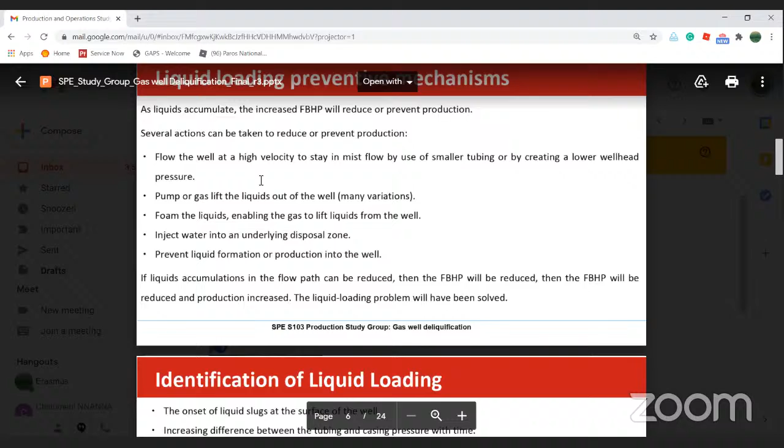Are you seeing it yet? Yes, we can see it. We can see it here. Yes, we can see.

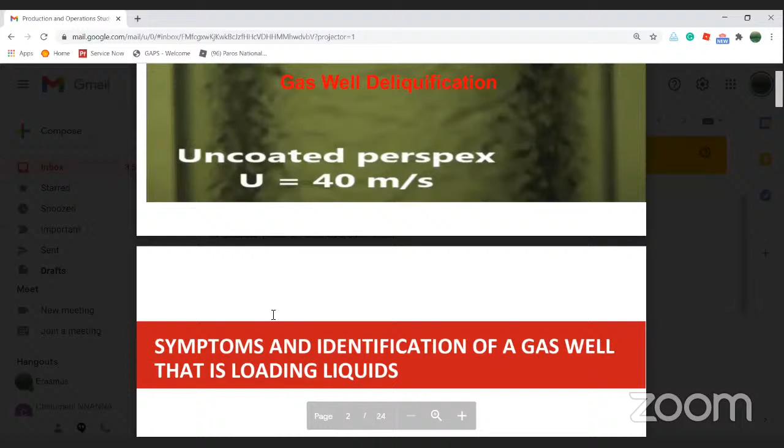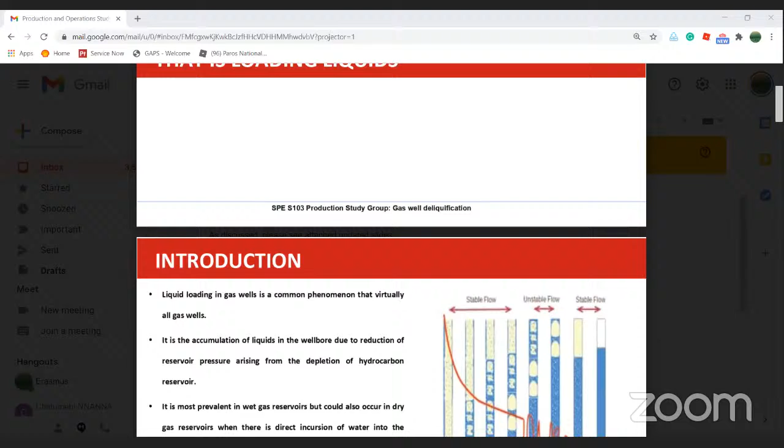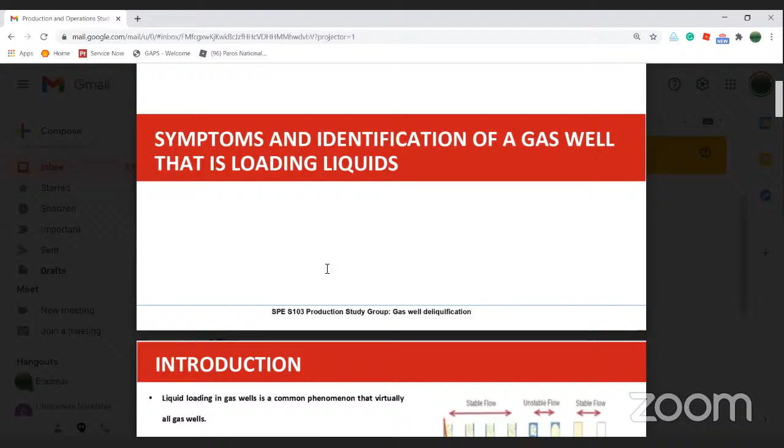So this discussion is really around gas well de-liquification, addressing the issue of liquids building up in the well, starting from the sump or rat hole, through the sand face, and into the tubing, reaching reasonable heights. The liquid itself is mainly water, both water of condensation from the gas or free water from the reservoir that is mobile and could be accessing the pressure interval, or natural gas liquids, which we loosely call condensates. These are the kind of liquids we produce with gas.

Over time, as the dynamics of the reservoir and well change, the gas, which is actually the transporting phase of the multi-phase mixture, begins to experience reduced velocity. Once that reduction starts, the carrying capacity of the gas reduces, and you begin to see what is shown in the diagram. Before, everything flows upwards as in the first picture. In the second, some liquid is not carried along until the liquid level builds up more, until the well can't carry on because the back pressure on the formation exceeds the reservoir pressure, and the well dies. A lot of things happen after that, but it's rare for this problem to start initially in the gas well. Usually with time, as the reservoir matures and dynamics change, including reduction in reservoir pressure and even formation damage, this can occur.

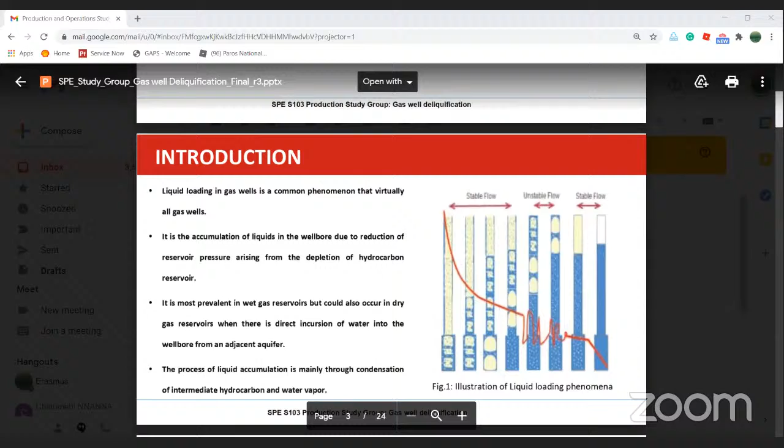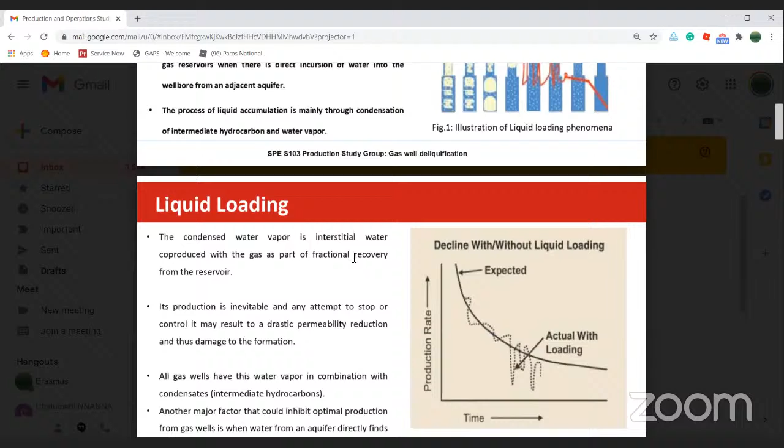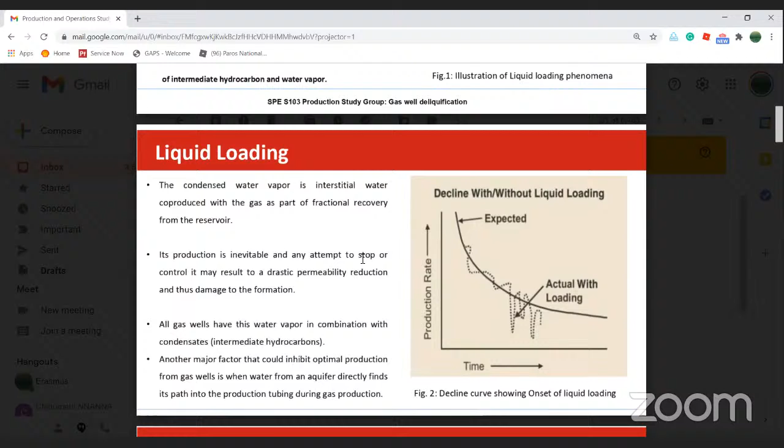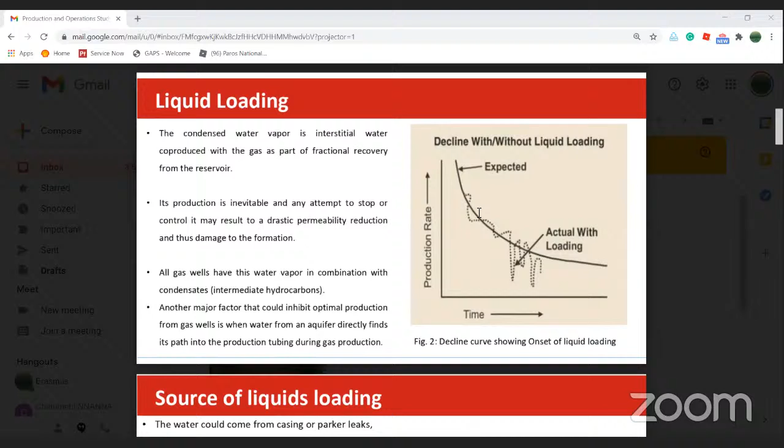So I mentioned earlier that the kind of liquid that causes this problem is water that accompanies gas production, which may condense out of the gas and build up. But mainly the natural gas liquids, which are the heavier components of the flow stream, have a way of dropping out over time and causing this problem. So you can see the profile of the well begins to show erratic behavior, instead of a smooth decline. Because back then it goes up and down, sometimes it now starts watering.

So the source of the liquid, like I mentioned earlier, could be coming from casing or packer leaks, or maybe from what we call coning, which is a phenomenon where you have an imbalance between gravity forces and viscous forces. Then you have a rise of liquid, as if the liquid is rising above gas because of the high drawdown that we expose the well to.

When you have a decline in the reservoir pressure, that also induces liquid loading. Anything that leads to a reduction in the flow rate of the gas well has a tendency of inducing liquid, because gas, being the transporting phase, must have sufficient velocity to lift the liquid along with it. Whenever that condition is not met, the liquid will tend to fall back into the well.

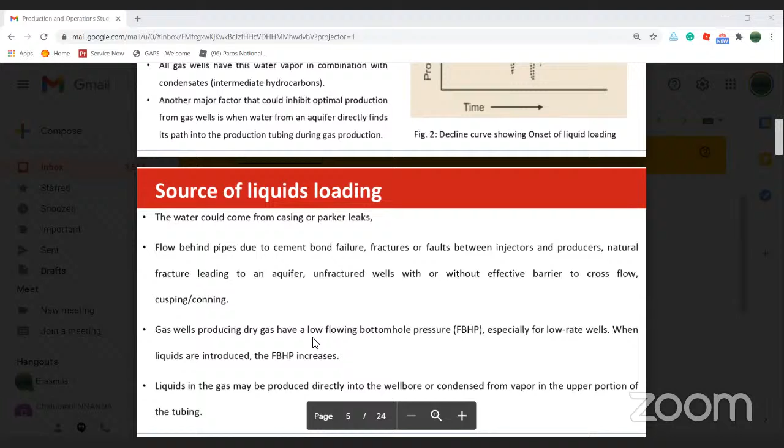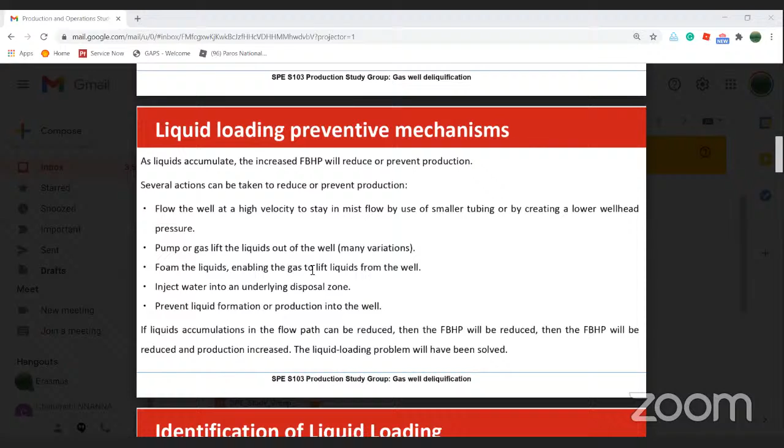So some preventive mechanisms for this phenomenon - in medicine they say prevention is better than cure, but in petroleum engineering it doesn't really hold. Some prevention would mean you shouldn't even produce the well at all. So sometimes we just let the problem occur and then try to find a solution. That is what happens most times. You will not drill a well and say water will never break through, because that means you will not produce at all.

So some actions you can take to reduce or prevent liquid loading: as much as possible, ensure that you are producing this well at a high velocity. That is when you still have control over that. The interesting thing about that is, yes, that's the only way you can, when the energy of the well still allows you to throttle it as you wish. But over time, when a lot of pressure decline has happened...

Then you can do pumping - a pump for the liquid, you install a pump that pumps it out for you. Or even do gas lifting of the gas wells.

So foam, you can also inject foam for the purpose of reducing the hydrostatic pressure of the liquid. Getting foam in there means the pressure that the liquid column exerts on the formation reduces when it's able to keep packing. But again, injecting foam continuously means major modification in the production system, and you also have to be aware of fouling the process.

Is it a good time to take over? Hello, Dr. Koleke. Hello? Is anyone hearing me? I can hear you, yes, now. I can hear you also. I can hear you now. Okay, I don't know whether they responded. Yeah, okay, so Doc, if you don't mind now, it's time to carry on, unless you need to get to the point where I'm coming in. Is it a good time? You can continue from where I stopped, so we do not repeat what I've said. Oh okay, okay, thank you very much, and thank you.

Good evening, Doc. Can we roll the slides down to just after causes of liquid loading? Let's keep going down, please. Let's go down more. Let's go down. No, can we go back a bit? Back a bit, sorry. Back a bit more. Back a bit more. Back a bit more. Oh, okay.

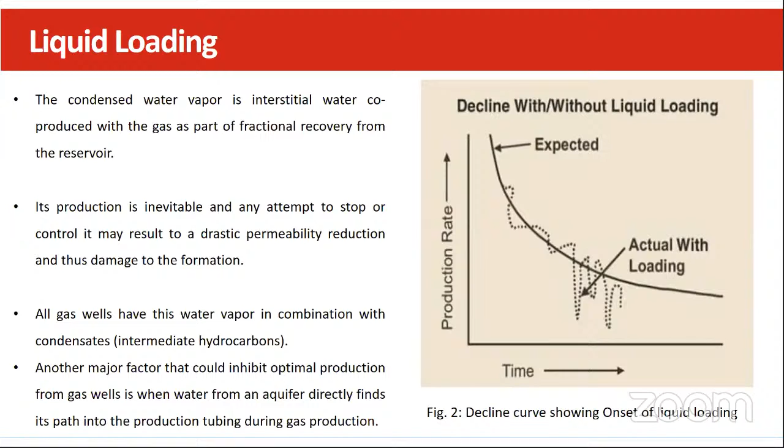Let's move forward. Let's move forward a bit more. Okay, we can stop at symptoms. Yeah, so basically, yes, we can.

Thank you. So some of the common symptoms of liquid loading - liquid loading is basically a situation where the liquid phase composition of a multi-phase stream from gas wells begins to drop off or drop back into the well bore, because the superficial velocity of the gas core is supposed to drag this liquid film. The liquid phase often occurs as liquid films at the walls of our tubing in the well system. So when gas velocity drops off, the gas core is no longer able to drag this liquid film up, and that's when we begin to have liquid loading. This often occurs when reservoir pressure is low.

So some common symptoms of liquid loading, things we observe that tell us liquid loading is around the corner, include the presence of orifice pressure spikes - we begin to have pressure spikes within our orifice, which is a pointer that we are about to experience liquid loading. Another thing is erratic production and increase in decline rates of gas wells. We begin to see drop-offs in our million scf - for instance, we're expecting 50 or 10 million scf, and we begin to see a drop to 8 or 6 million scf, which is not what any operator wants.

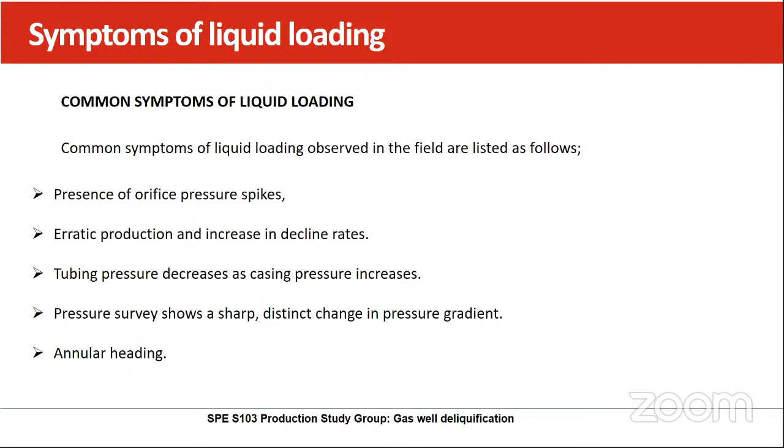Then annular heading - annular heading is more or less some form of slugging within the gas well system. So Simeon, can we move on to the next slide, please?

So as part of identifying liquid loading, we need to be conscious of knowing when we have onset of liquid slugs within the gas well streams. Liquid slugs mainly means you begin to have fluctuation of your liquid films - they begin to go up and down, creating oscillation within the system. That's also a pointer to liquid loading.

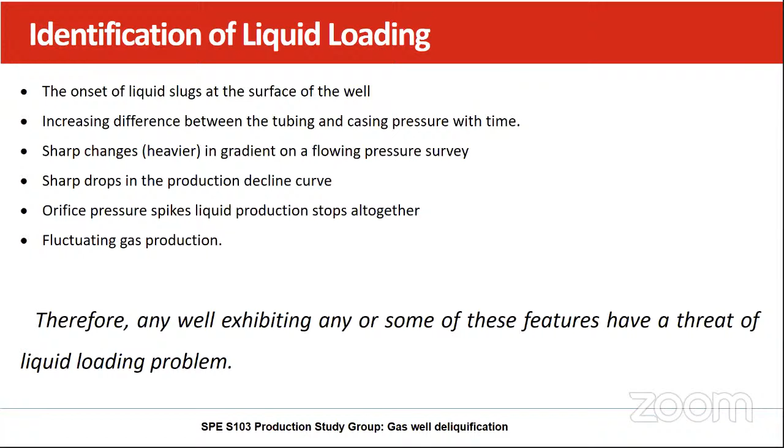Then we begin to have increasing difference between the tubing and casing pressure with time, similar to some of the things mentioned earlier. Then sharp changes in the gradient, also similar to earlier points. Then fluctuation in gas production - these are very threatening signs, which is not good. Can we move on to the next slide?

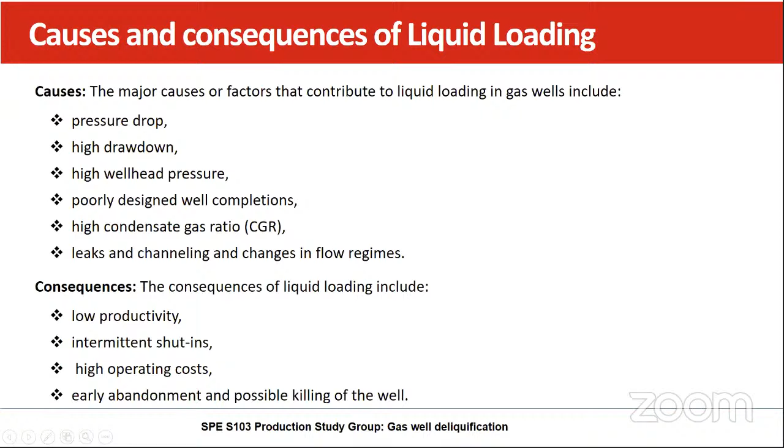Then the consequences or results that come from liquid loading include low productivity, which no operator wants to have. We could have intermittent shut-ins, high operating costs - these are things operators do not want at all. But these are the consequences that could result from liquid loading. And most importantly, we could have early abandonment, which is not what we want.

Thank you, Simon. Another important thing is, what are the preventive mechanisms for liquid loading? As liquids accumulate, we have an increase in our flowing wellbore pressure, and there are several actions we could take to prevent that. Number one is to flow a well at high velocity to stay in mist flow, by use of smaller tubing or creating lower wellhead pressure - basically trying to reduce the drawdown or reduce any form of inhibition to getting your gas stream to the surface. Another preventive mechanism we can apply is the use of a pump or gas lift.

So, be able to support the production of the gas phase. Then we could also apply foam within the liquid phase. This could enable the gas to lift the liquids from the well.

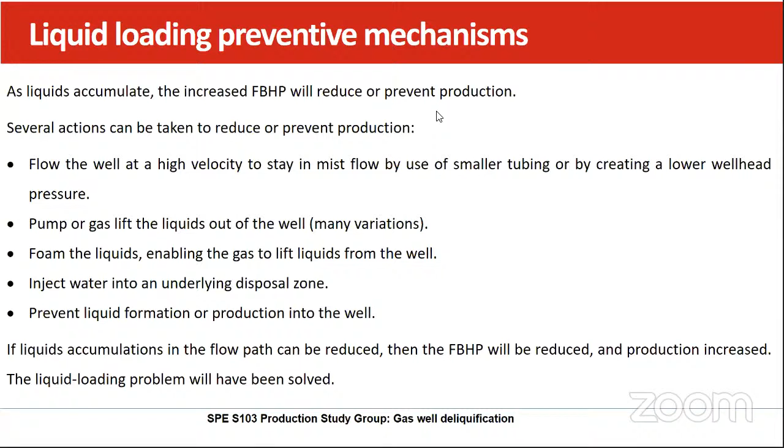So methods available in the industry to manage liquid loading include maintenance of natural flow, assisted lift of the plunger, downhole pumps within those gas wells to support the pressure within the system and make sure you're able to overcome the hydrostatic head that could prevent your gas stream from coming to the surface. Then we also have downhole water sinks or downhole gas-water separators, because if we're able to separate downhole, what we need to lift from our gas well will be lighter and easier to lift.

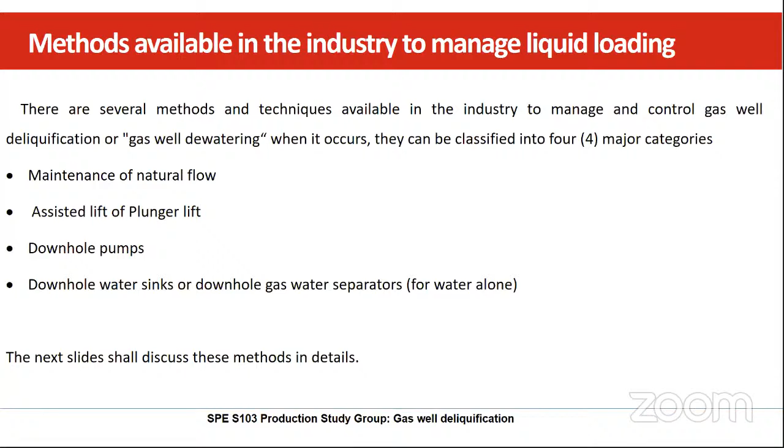So the next slide is about current and emerging techniques for de-liquification of gas wells. It's also key we need to consider. Some of the methods include sizing production strings or installation of a velocity string. There needs to be properly designed strings which you could install, as well as installing them with injecting foamers, which I mentioned earlier, a key technique operators need to look out for because of its effect causing coalescing of the liquid droplets within the walls, making it easier for the gas within the core to push the liquid up.

Then compression is also another technique that should be given attention, and then plunger lift. We have in Fig A and B some of these methods illustrated. So can we go to the next slide?

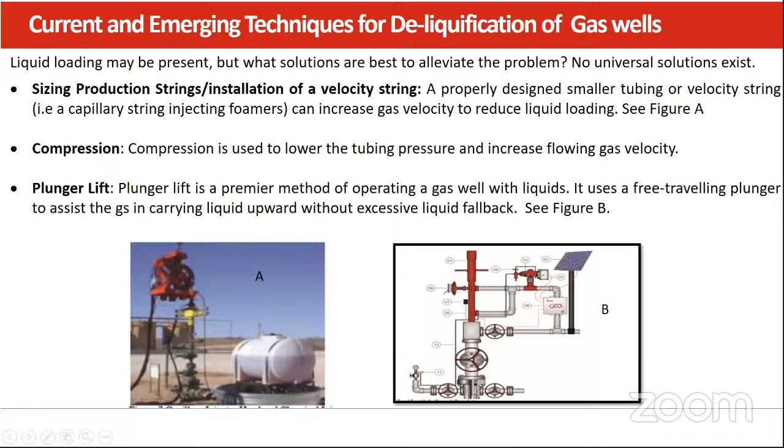So still on the earlier slide, that was more around the current techniques. For some of the emerging techniques, we have beam pumping. In the beam pumping system, it functions when the wells do not have enough pressure and the gas liquid ratio is not conducive, so you use the beam pumping. It's similar to using some form of downhole pump to manage your system.

Then we also have hydraulic pumping, which is using hydraulically powered pumps to support your system. And then we have injection systems. Instead of producing water from the gas well, it's possible to rather inject the water into the zone below the gas, and this could enhance your production and prevent liquid loading.

Some other future methods include automated intermittent production using wellhead temperature as a proxy to help guide you. Then you also have enhanced oil recovery methods you could use, as well as water lift downhole pump methods. So can we move to the next slide?

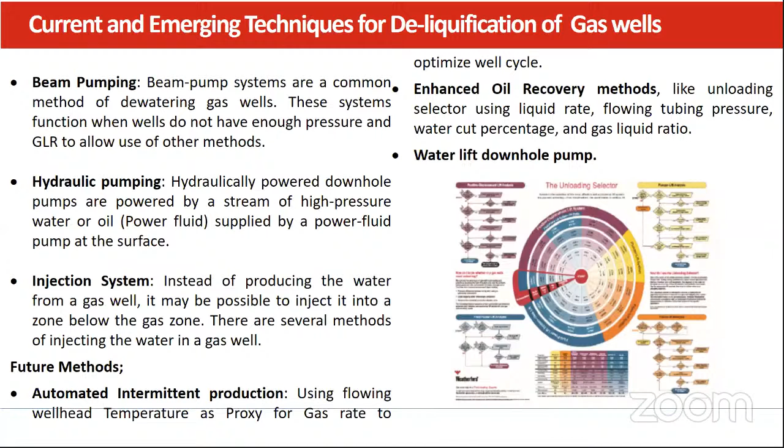So, nature and causes of liquid loading. Erasmus, I don't know if you can come in here a bit. Are you there? So, but I'll carry on. So, nature and causes of liquid loading. Okay, I don't know, are you there? Yeah. Can you come in from this area, or do I carry on? Yeah, I think you have momentum already, but let me just talk through this then.

Okay, so like Doc has been saying, it's really about low rates, right? So when you can, always ensure that the gas has a sufficient rate. And when I say rate, it has a direct proportionality to velocity, right? So the nature of this is that low gas rates begin to occur, either the one you instigated yourself by producing at abnormally low chokes, or the one forced on you by the dynamics of the rates of water. Like imagine cutting water, which means your envelope of production deteriorates, and what the well is able to deliver is lower.

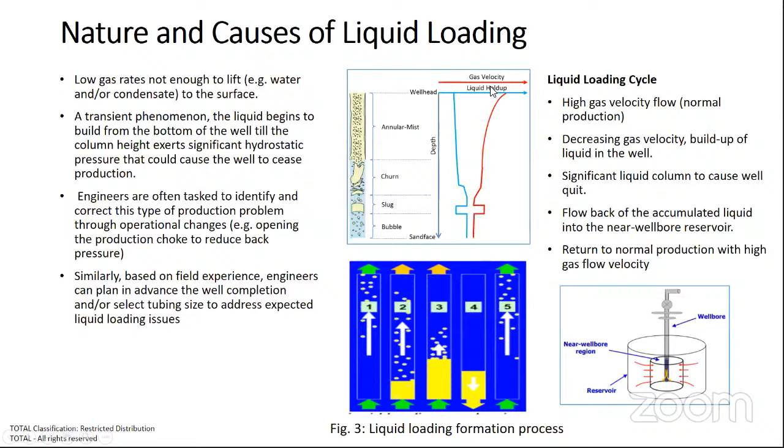And then, if for some reason you overestimated the capacity of the reservoir and oversized the production tubing, expect the liquid loading will be very, very high. And if you have formation impairment, it will cause deterioration of your inflow performance, and that also influences liquid loading.

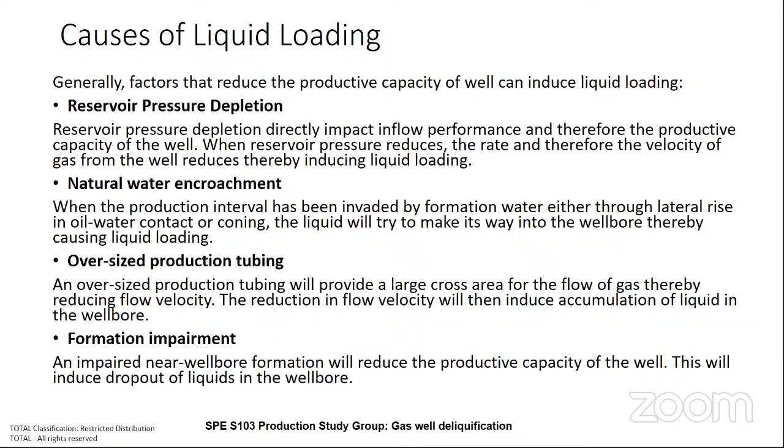We brought out a case in the Niger Delta because it's important we do not address this as a theoretical problem - it's not enough to be aware and say yeah, there's something called liquid loading, but never see it. So this is a well that is completed with 7-inch tubing.

So this is a well completed with 7-inch tubing, a high-rate gas well shooting over 100 million scf per day for over 5 years before we began to see decline. The initial CGR was decent, around 80, and it produced significant quantities of NGL.

Then the aquifer support was moderate. What that moderate aquifer support meant was we had some depletion, about 8% depletion of pressure, as occurred over time. And then the plant inlet pressure - this is very key.

Every gas plant for processing produced gas has a minimum pressure it is set at. That means everywhere you have to overcome that pressure for the gas to come into the gas plant. So the plant inlet pressure is 1,200. That means if a well has a flowing tubing head pressure of 1,000, the well cannot produce.

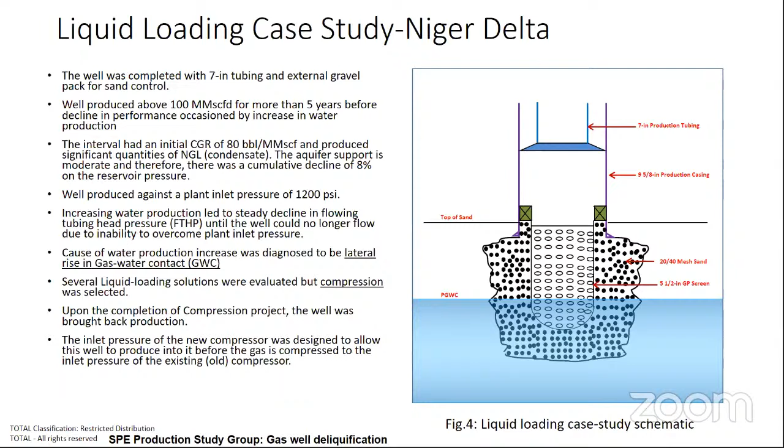What this means for such a well, just in case you see them, is you go there, there's flowing tubing head pressure when shut in. But when you open it up, the pressure drops, and it means the well will not be a useful asset to you.

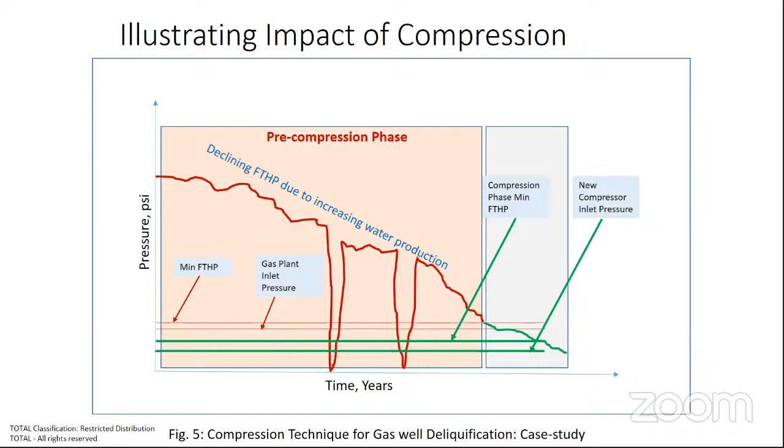Almost all gas wells produce wet gas, so it's important to know there's always some portion of liquid that comes with the gas we are producing. That's what often leads to liquid loading in gas wells. Water and hydrocarbon condensate make up the main liquid phase composition.

Initially, as my colleague Ras mentioned, we have high rates, and those high rates make it stable for you to continue producing. This is prevalent within the annular flow regime, when you have gas at the core and you're able to drag the liquid films on the side.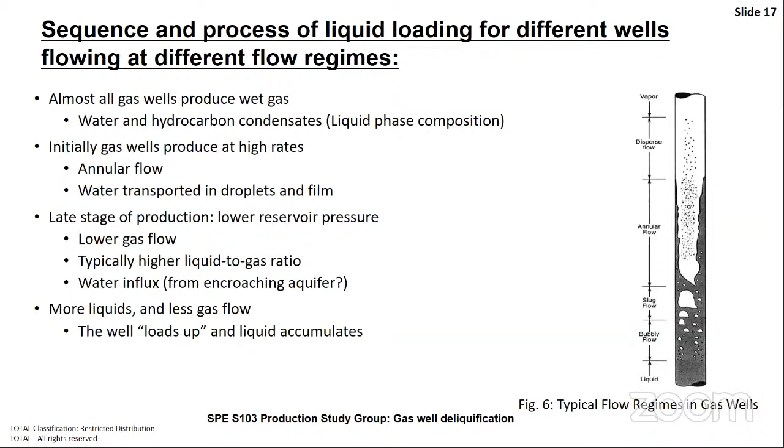So here we try to illustrate a typical production scenario where you have liquid loading. We can see the green spikes representing the gas rate, the blue spikes representing the liquid rate, and the red dots representing a typical forecasted production.

Within the unloading region, which is the first region, gas moves at almost the rate that was predicted. As we continue into the loading region, liquid rates begin to increase, and we have a situation where our gas rate begins to drop.

The gas rate goes down, and then we move into a region where you have a lot of noise and fluctuation between the gas and liquid phases, and that leads to the problem of liquid loading, which we don't want. Oftentimes this could lead to the killing of the well.

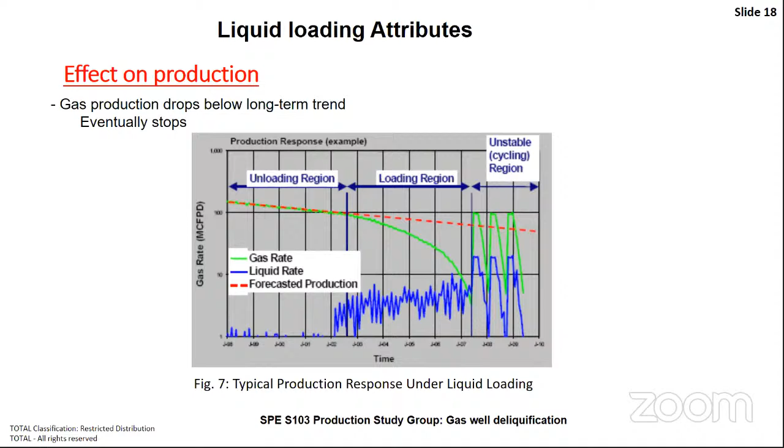So next slide, please.

This is pretty much similar to what my colleague Eras illustrated, so I won't spend too much time on it. We have phase 1 at relatively good gas velocity, and phase 2 where things are also relatively stable, but phases 3 and 4 begin to show a drop in gas velocity.

It's important to note that in terms of flow regime, we begin to have liquid loading more when we have a slugging flow regime, where our gas velocity drops very low, because slugging is associated with low reservoir pressure and low gas velocity. That's where liquid loading is prevalent.

But under annular flow, which in terms of design is what design engineers should look at, they could design the production rates they're aiming for over the course of the life of the field to occur mainly within the annular regime, because a number of published studies suggest that the annular regime is where you can hardly have liquid loading. So it's important to note that the annular flow regime is key to managing liquid loading. Can we move to the next slide, please?

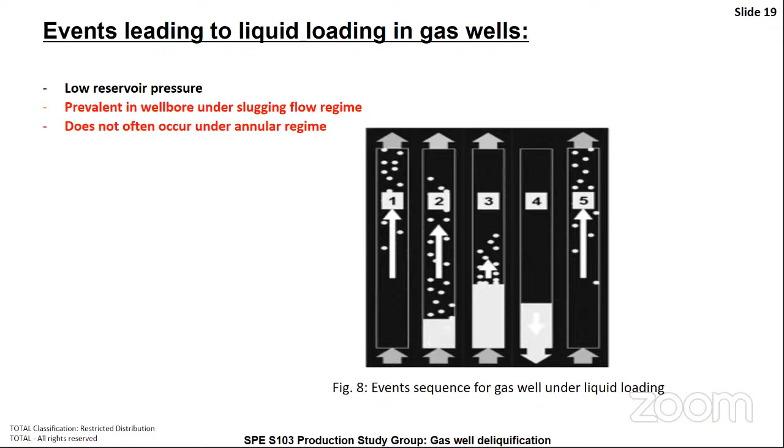So by way of summary, in terms of sequence: first, both gas and liquid are produced to the surface at relatively good gas velocity. Second, there's a decrease in gas velocity over time, leading to possible reversal and accumulation of liquid at the bottom hole. Third, due to this liquid accumulation, the bottom hole pressure increases, and that's not where you want to be when managing a gas well.

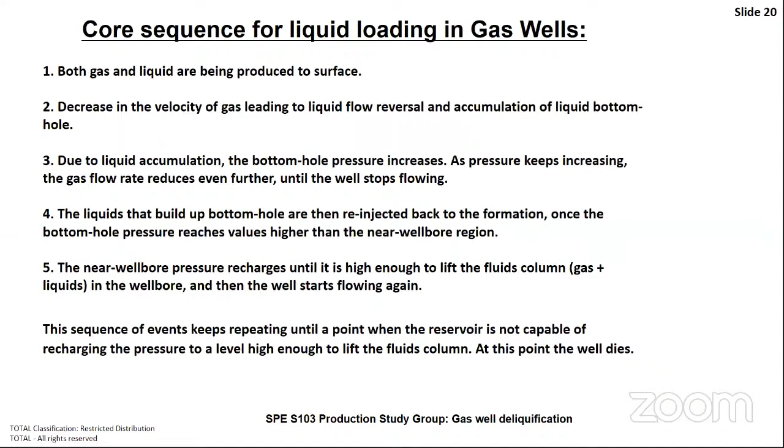Fourth, the liquid builds up at the bottom hole and begins to get re-injected into the formation, which leads to a lot of increase in pressure, making the hydrostatic head needed to get the gas stream to the surface much more cumbersome to overcome. This is pretty much the sequence you have. Then fifth, you have near-wellbore pressure recharging because of this fluctuation. Next slide.

So in terms of process, clearly liquid loading is transient in nature. It's not a steady state phenomenon. It's a transient phenomenon where as a result of fluctuation or variation in the gas phase velocity, we begin to have a point where the gas velocity is high enough to keep us producing the gas stream. Then over time it drops, and that leads us into the problem of having these segregated liquid films dropping back and accumulating into a heavy weight that gets back into the wellbore.

Then another thing we need to take note of is understanding the flow features taking place within the wells. It's important to predict the regimes we could experience, and understand how we could influence these flow regimes to possibly occur within the annular flow regime.

Then temperature, pressure, liquid hold up - these are some of the parameters around the bottom hole that we need to place our focus on. Although it's pretty challenging, I think it's something industry stakeholders need to start looking at - the possibility of having sensors that could read off these parameters within the downhole region, because that is a potential way to solve this problem much better.

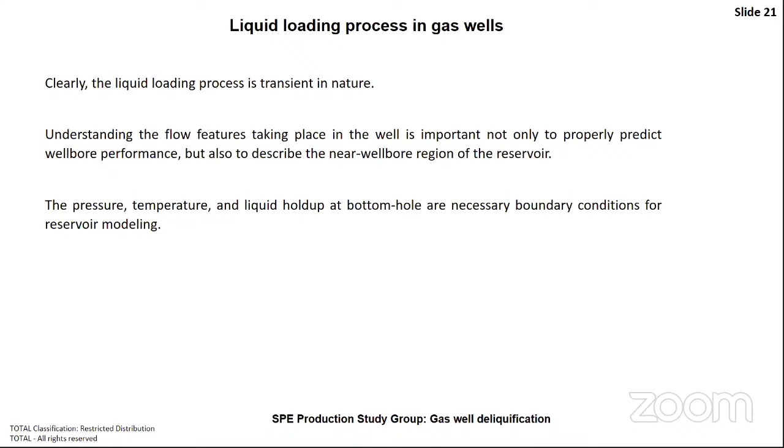So here the focus is on exploring what happens post-annular regime, because the annular flow regime is where you find it difficult to experience liquid loading. But post that, especially if you go into your slugging phase as your gas velocity drops, that's where the challenge is, and that's what we are looking at here.

So annular flow regime is generally encountered in the early life of a vertical gas well prior to onset of liquid loading. So how to maintain this phase long enough should be at the top of mind of any production team working on gas wells.

Then in this flow regime, the liquid, water, and condensate flow in two different fields. You have droplets in the gas core, and then along the pipe wall you have liquid films. Just like you'll see the pale blue part on the wall of figure 9 - that's pretty much liquid film.

This could, as your gas velocity within the gas core - with the arrow upwards in the center - begins to drop, lead to potential problems. So the liquid film, the rough liquid layer adjacent the wall, how can this be coalesced, maybe by way of foam and all that? It's important to understand how that could be done efficiently to help manage pushing the gas stream up.

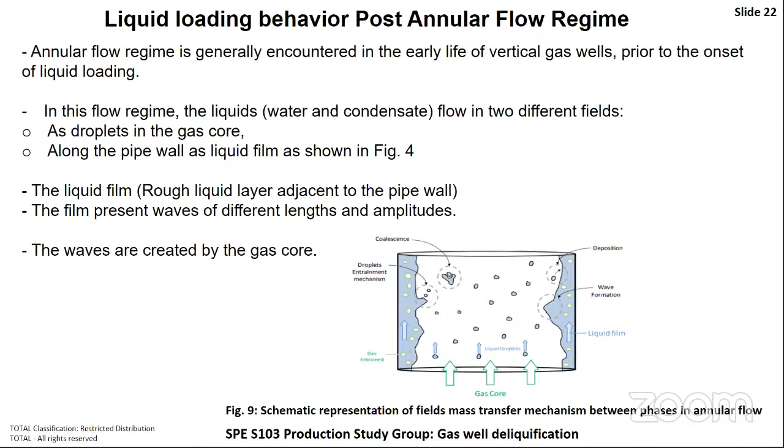So here we look at the physics of liquid loading. Basically you're looking at how you can transport the liquid films around your wall more effectively. So you have droplets, the gas core, and you have the films along the tubing wall. How can you operate at a suitable gas velocity that can help move this liquid film upwards?

Then we need to make note of vertical flow. We need to be mindful of variation in droplet size. We need to be mindful of the film, being able to get the liquid film to move evenly, because if they don't move evenly, they could affect the gas velocity - they could lead to a further drop in the gas velocity.

Then another important thing to note is deviated flow, which we could experience when the liquid film is also not evenly distributed.

Then we need to also be conscious of the mass fraction contained in the droplets, how they vary. If they vary in an unsequential way, it could lead to this gas core not being able to push the liquid film more effectively. And finally, we have the liquid velocity.

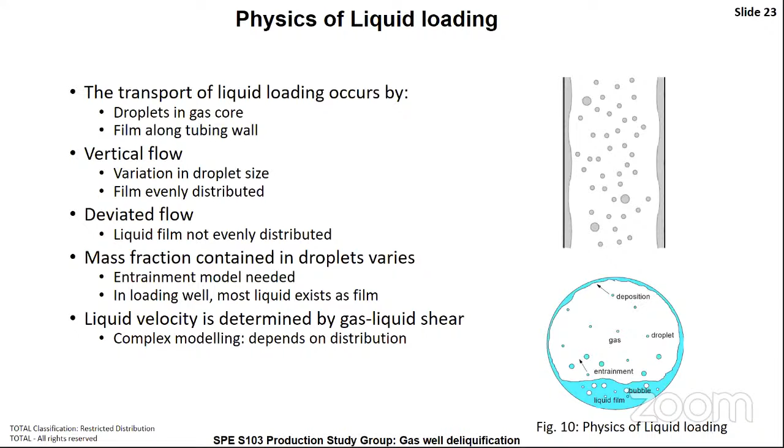So here we begin to look at the areas that we can improve for us to be able to manage effectively an already loaded gas well to prevent stopping production. So managing loaded gas well focuses mainly on increasing the velocity and artificially lifting the liquids, looking at how to push up the liquid within the walls of our pipe more effectively.

Areas of improvement in management of liquid loaded gas wells include, one, well bore heating to prevent liquid loading. When we heat the well bore to the reservoir with the aid of heater cable systems, this will help us have a lesser liquid portion to grapple with. That's one area that needs attention in terms of application, and this could also lead to the liquid phase being managed better.

Then the next one is insertion of tubing joints. Our ability to insert or place tubing joints properly, and properly sized tubing joints as well, would help us manage this liquid loading in gas wells better. Can we go to the next slide?

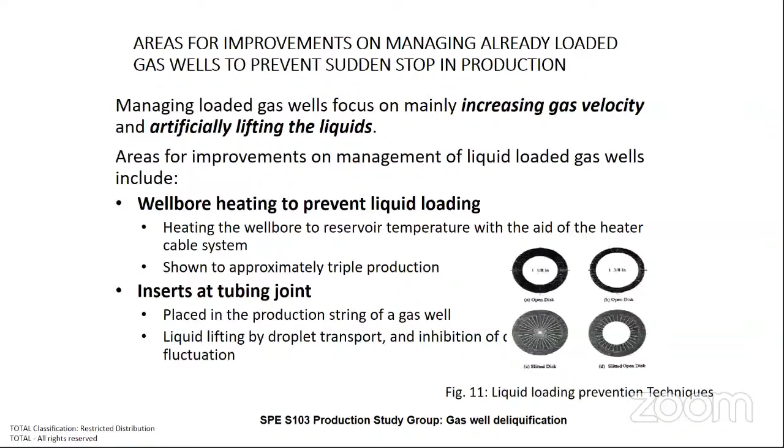Still on areas of improvement, we have the issue of tubing wall modification. We're able to modify our tubing walls better, especially in terms of sizing. This could help us optimize the gas velocity and prevent reversal of the liquid phase into the wellbore. Film flow reversal and droplet flow reversal cause liquid loading, and we don't want this liquid phase coming back into the wellbore. So if we're able to optimize the design of our tubing wall thickness and the appropriate diameter, probably depending on the expected reservoir pressure and flowing tubing head pressure as well.

Then we also need to be able to modify the properties of the tubing inner wall, in terms of maybe heat retention and all that. That could help us minimize the liquid portion that we will need to deal with.

Another modification that could be explored is application of hydrophobic or hydrophilic coating systems with change in wettability. These forms of coating system could help the liquid film either easily coalesce together or disperse, so it's important that we explore the ones that can rather help the liquid phase coalesce together better. Then applying tubing taper, then applying tubing orifice insert. These are also key things that we could explore.